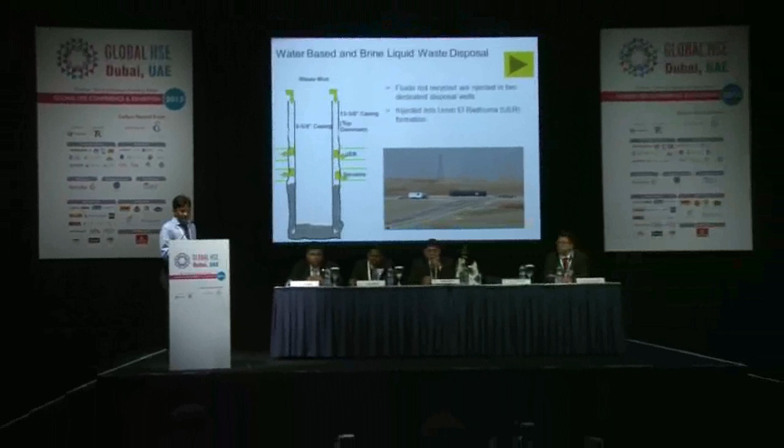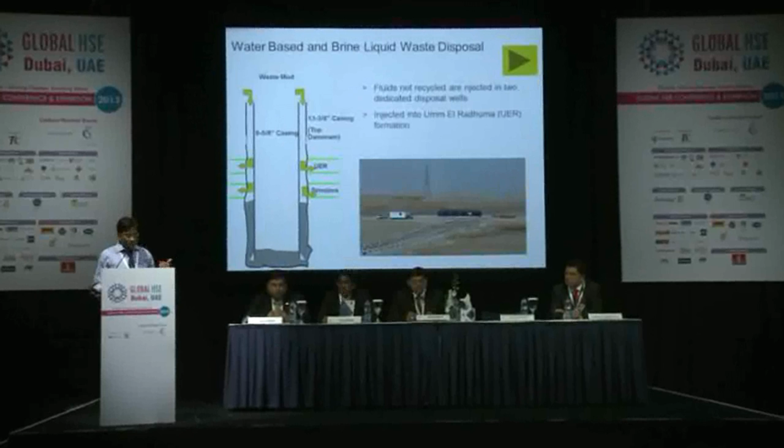The waste disposal wells are in deep reservoirs—you can see this is the UER and Simsima formations, at 3,500 to 5,000 feet depth. From reservoir studies, it has been observed that their permeability is very high, so they can absorb a lot of waste. I can also show you in my next slide why this is not a concern, because it is a very hypersaline aquifer, which will not be affected.

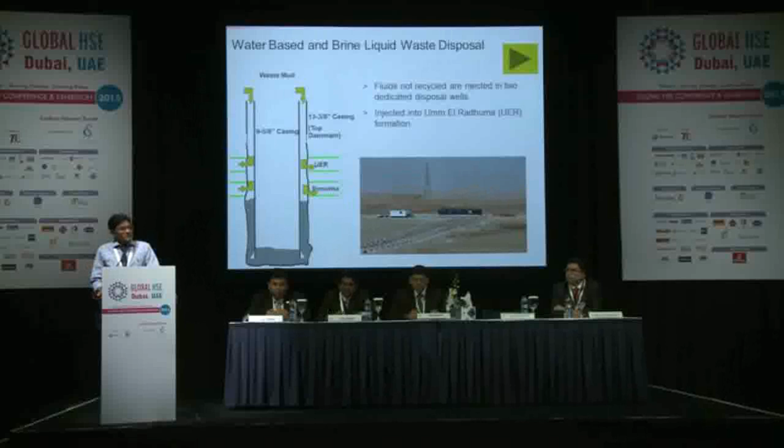For this facility, the two wells we have are located between the fields. To optimize traffic and transportation, we positioned the two wells such that traffic should not be increased. This facility consists of storage tanks, which you see here, the injection well, and the pumps.

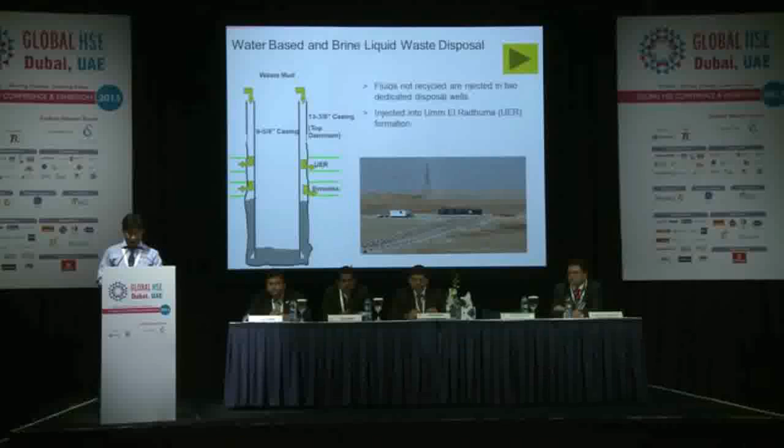So this is the regional reservoir which I was talking about. See, we are injecting into two aquifers, which is Simsima and UER.

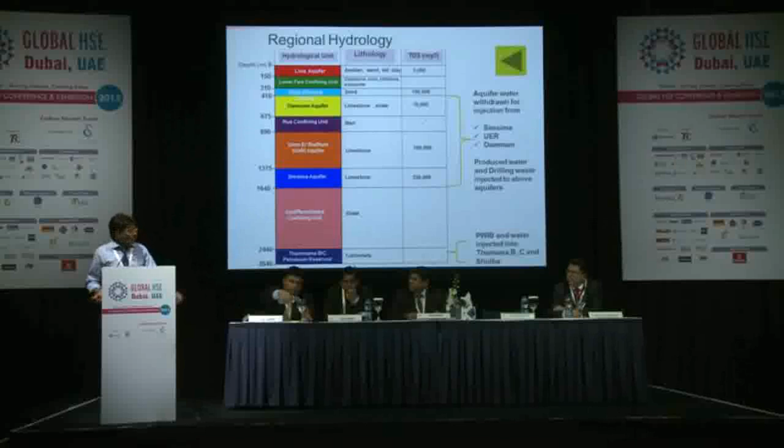If you see, the salinity here is 160,000 ppm and 230,000 ppm. Even our seawater, the Gulf water, has salinity of only 50 to 60,000, whereas this aquifer water is 160,000 to 230,000. So it cannot be used for any other reservoir.

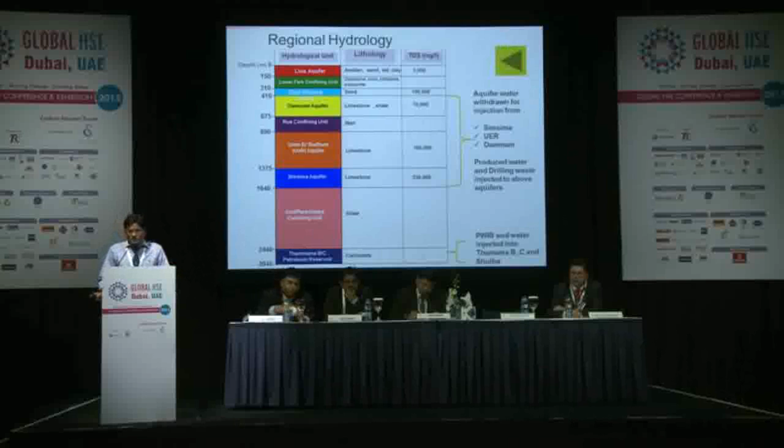We are committed not to exploit the shallow groundwater, which is an important source here - the Liwa aquifer, available up to 500 feet. So no activities are taking place in this aquifer.

So whatever injection is done here, even the water required for our injection purposes, we are taking this hypersaline water.

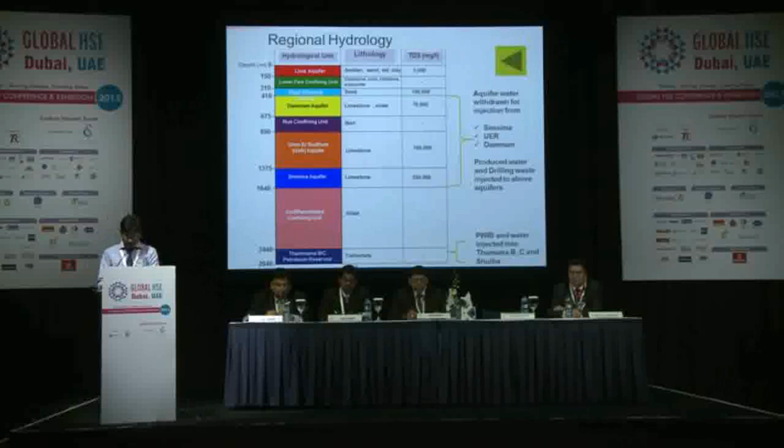Coming to the oil-based mud - we are using oil-based mud for drilling efficiency, and in order to avoid disposal of the oil-based mud and also to ensure recycling, we have established a dedicated mud treatment plant.

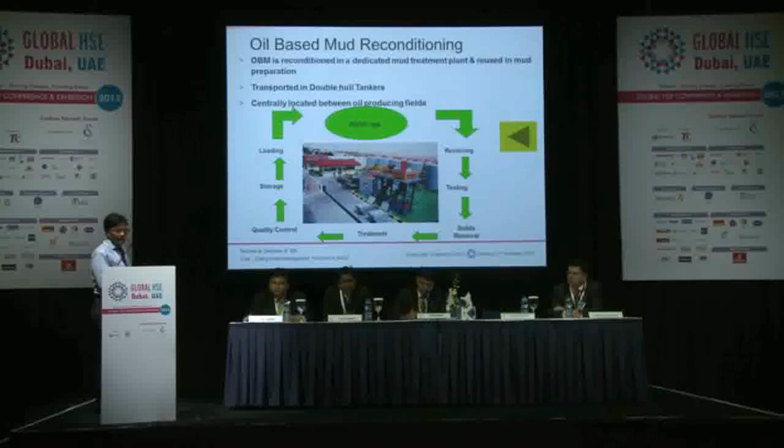After that, this is the laboratory, where quality control is ensured, and it is again sent back to the rigs.

While transporting, in order to avoid leaks and such issues, double hull tankers are deployed while transporting from the rigs to this treatment plant. This plant is also centrally located to optimize travel distance.

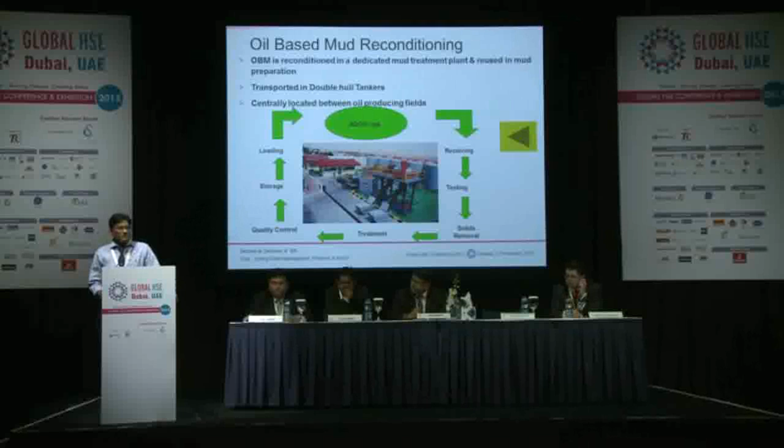Another liquid waste is the common waste - sewage - generated from the rig camp as well as from the rig site. Generally 100 to 150 people will be staying in camp, and they are also moving.

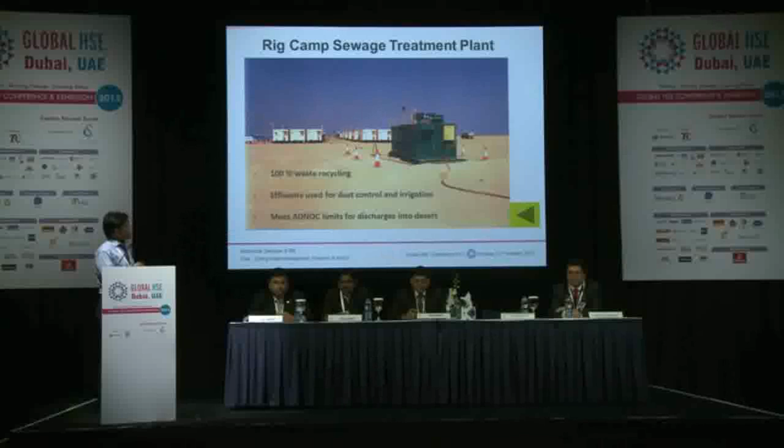In order to ensure the sewage is treated, a package sewage treatment plant is deployed. This is an aerobic treatment process. It consists of an aeration chamber, then a clarifier, then a sand filter, and chlorination. This water is then collected and used either for dust suppression or sometimes for the green belt. Because these camps are moving, it is difficult to raise a green belt, but if a permanent camp is there for a long time, the water will definitely be used for the green belt.

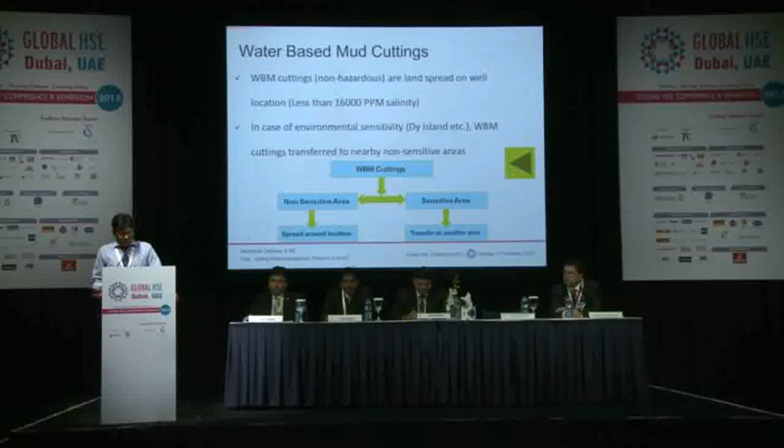Next is about solids, and how we are controlling them. So then we come to water-based mud. Water-based mud is generally categorized as non-hazardous because the toxicity of water-based muds is not that much - it doesn't qualify as hazardous waste.

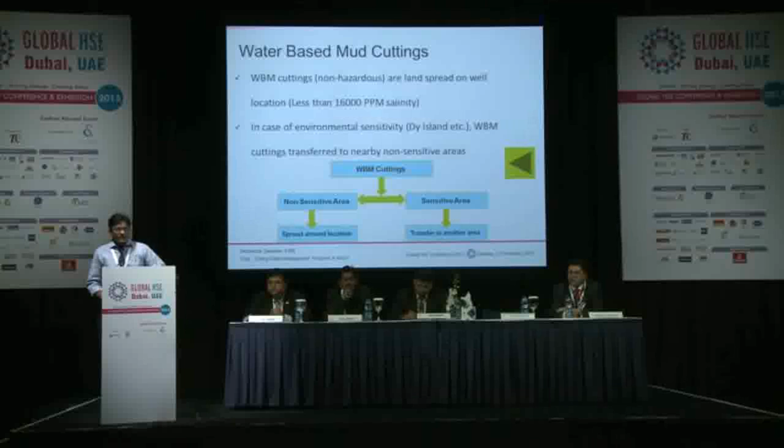So when the TDS or salinity of these cuttings is less than 16,000 ppm, we dispose on the rig site, because we test that the desert soil salinity is more than 30,000 ppm, so it is not going to even dilute the salinity. This applies in the non-sensitive desert areas.

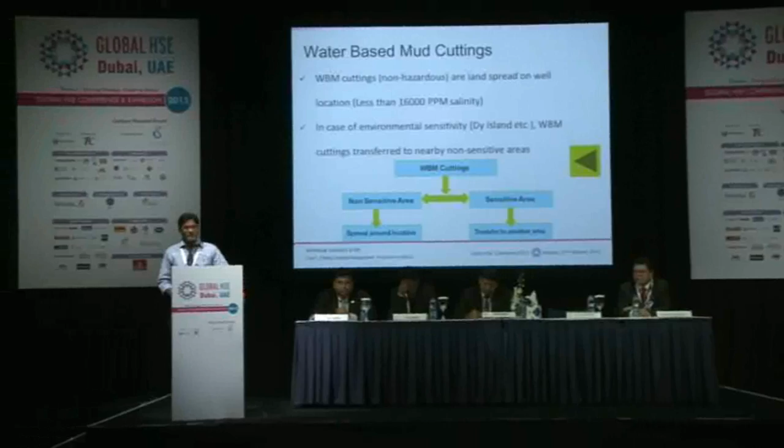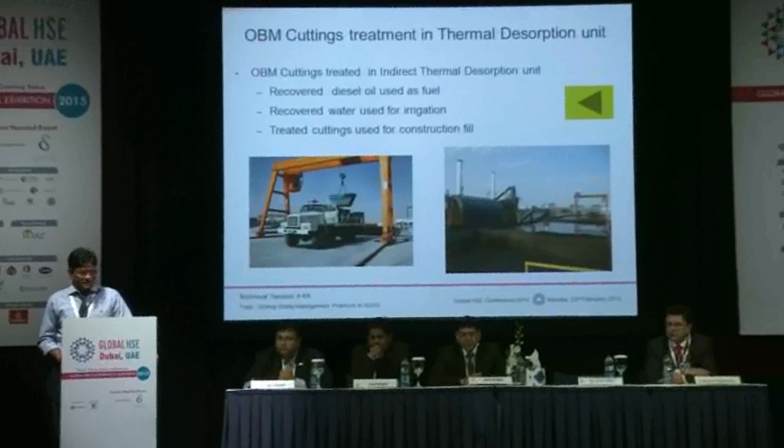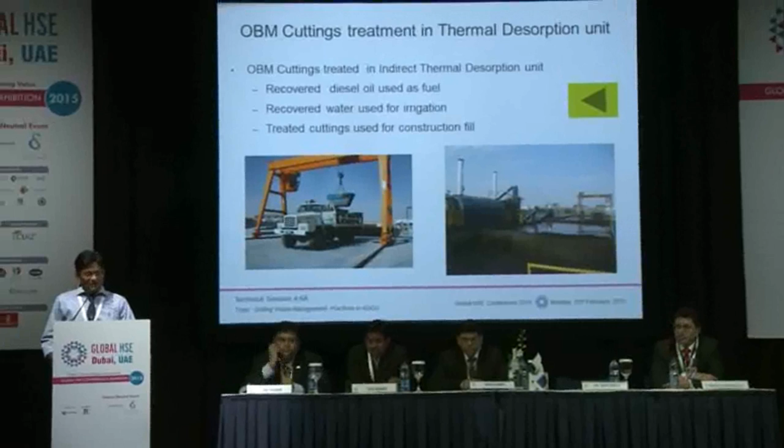We have studied a number of options - bioremediation, land farming, injection, and other methods. But from our studies, we found thermal desorption is a very good method of treating, because you totally recover the oil, and whatever comes out is non-hazardous. So what we do is use the indirect thermal desorption method.

This is our thermal desorption plant, where last year we treated about 30,000 tons of cuttings. It has all the facilities like loading, unloading, and a mixing facility, because sometimes some wells have less oil content and some cuttings have higher, so in order to ensure blending, they mix and feed into this kiln.

This is indirect - the heating is done without oxygen. The heat is applied on the outer shell and the cuttings are inside. Then these volatile organics, VOCs, are vaporized, and the vapors are condensed, then recovered as oil.

The cuttings are then used for construction activities. The oil content in this is 0.1% or 1000 ppm. The water used also comes out heated, since it's heated up to 450 degrees, so that water is used for cooling the cuttings, and also, since it's an open area, for dust suppression systems.

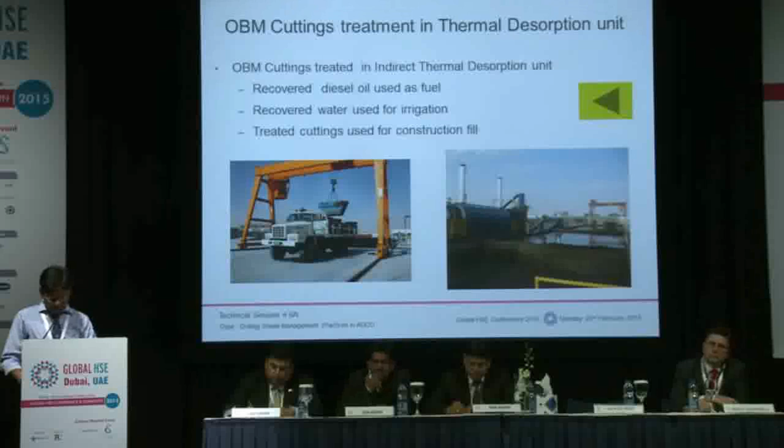Whatever other waste comes from the drilling operations, other waste like chemicals, sometimes expired chemicals, some electrical things or lamps. There is an ADNOC facility, we have a BeAAT facility. It is a centralized facility for all the ADNOC companies, which has a range of treatment systems.

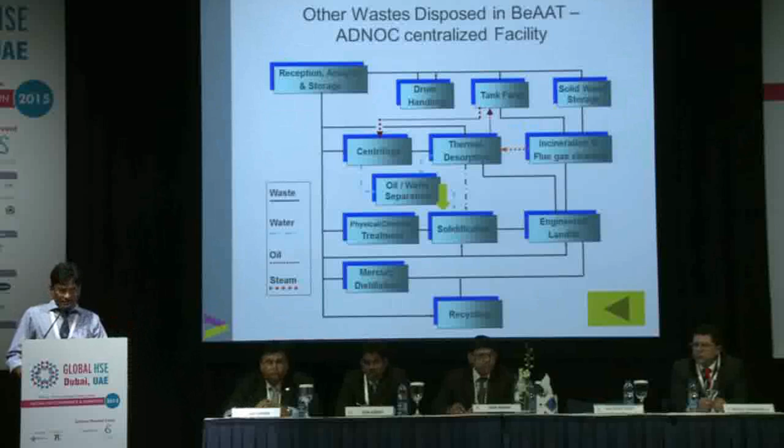Next thing is this is a new initiative. So what we have done is, to make it a sustainable waste management practice, we contacted Lafarge. It is a very big cement company, working in 150 countries, and they are also committed to sustainability.

They have come and taken our OBM samples, and from the samples they found that these OBM cuttings can be used in the cement plant. And they came to that conclusion by using the cuttings in the cement process.

There are two areas these cuttings can be utilized. One, because the cuttings are basically shale and sand particles, they can use it as raw material. And it contains about 20 to 30% oil - this oil can supplement their fuel consumption, and it will be mixed and used at the end. The total thing is incinerated, meaning there will not be any ash.

In other treatment processes, there is an end product which we need to again dispose of. So this will ensure a total waste management solution. And this also has high temperatures like 1400 degrees, so furans or whatever comes out is totally destroyed in this. So we are also doing a 1000 ton pilot project with them.

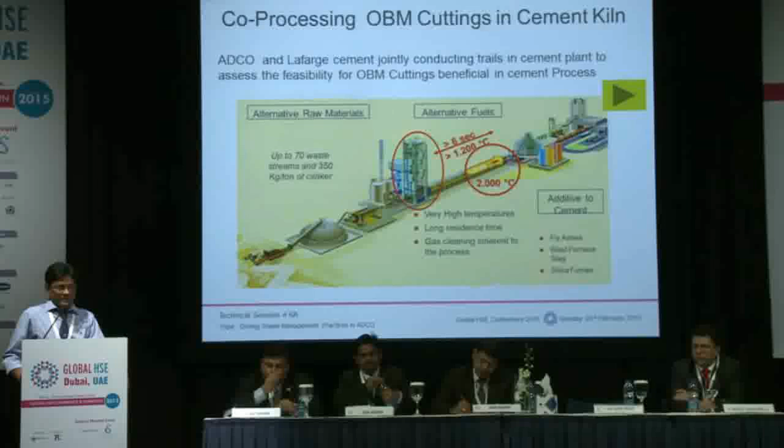This is one technique which I want to share. This is not completely related to drilling, but it's about oil sludge. This is what we do when we are storing a lot of oil, like 5 days, 10 days storage, in big tanks. There will be accumulation of sludge at the bottom of the tanks, and it will gradually reduce the capacity.

So in order to clean them, we have to desludge frequently, every 5 to 7 years. In one of our export facilities like Jebel Dhanna, there used to be a lot of oil sludge generation because disposal was not the favored option. So we looked into a number of options, and we came to know that mechanical desludging with a decanter is the best option.

So what we did is, in the tanks we used turbo mixers with added crude, so that the hard particles will be made into a semi-solid, semi-liquid state, reducing the viscosity so it can be pumped. Then the mixers are used and it's pumped to the decanter. This is a two-phase decanter, then it is separated into liquids and solids.

These liquids go to the nearby tanks, and solids are collected in boxes and sent either to the BeAAT facility or to our thermal desorption unit, where we can totally recover the oil.

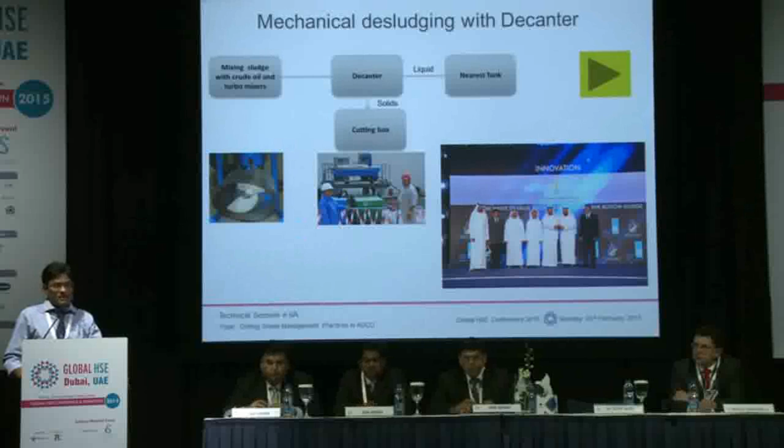So this is the conclusion. ADCO is using best technologies and best practices. Not satisfied with that, we are also exploring a lot of new technologies, as I explained.